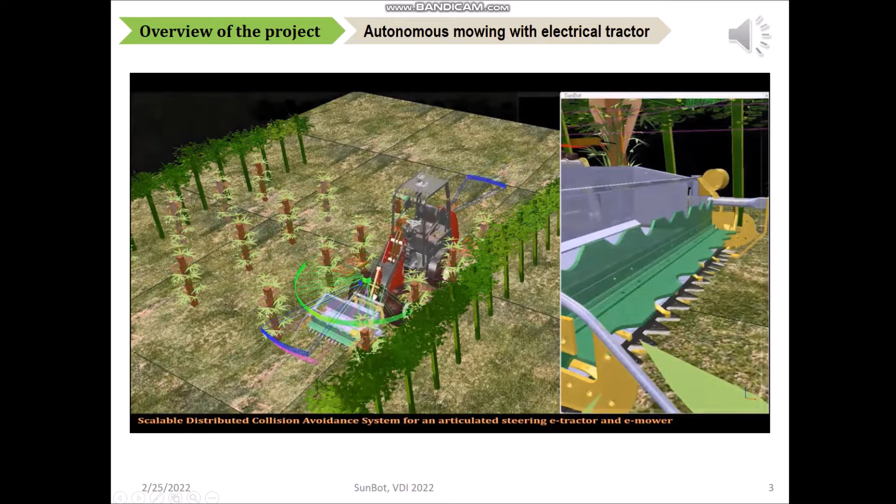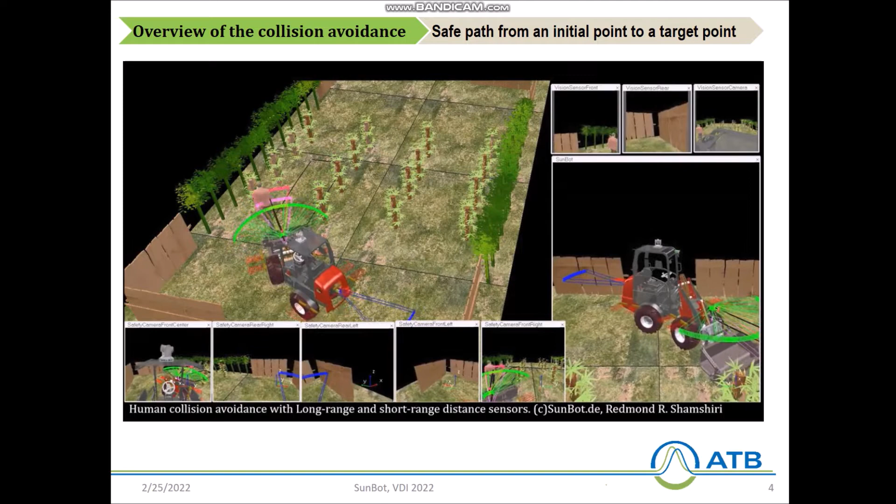The objective of this study was to develop a collision avoidance toolbox for SunBot electrical tractor. For this purpose, we used a four-wheel steering mobile robot platform for experimenting and validating the proposed hardware and software. This step was necessary to come up with a final solution for the main electrical tractor.

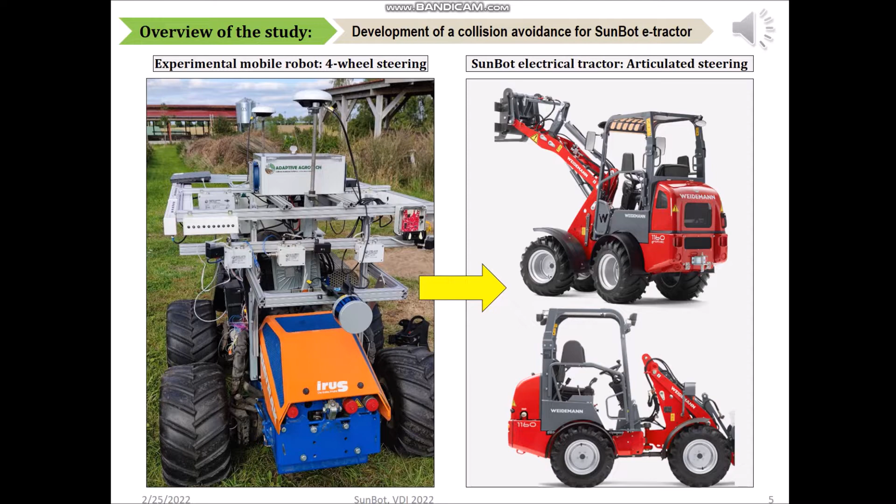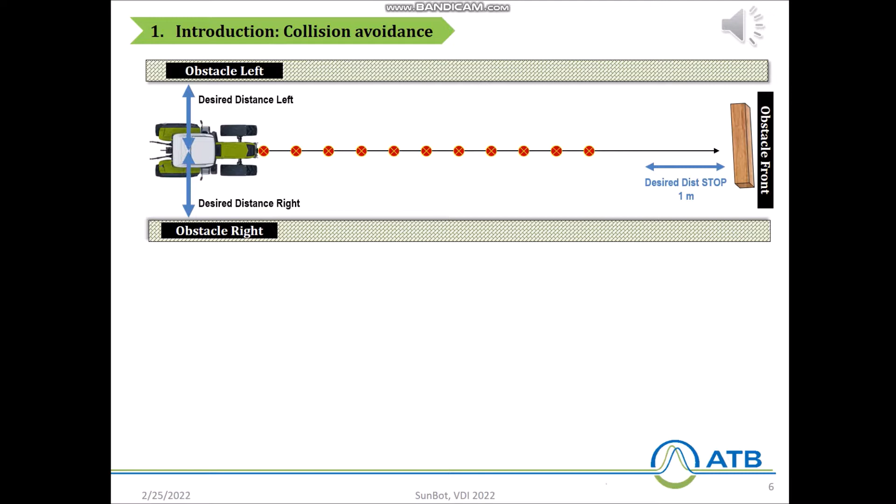To be on the same page, let's look at the overview of a general collision avoidance system. As it can be seen from the slide, we have an orchard tractor that is required to autonomously navigate inside plants row, while at the same time manage to be in the center of the row and avoid obstacles on the front, left, and right. These obstacles include random objects, human, animals, and bush support.

For this purpose, we need a set of reliable sensors that can measure the distance between the vehicle and its surroundings at a minimum rate of 10 readings per second. Based on these measurements, an error signal is generated by comparing the desired distance and actual distance between the vehicle and the obstacles. The main objective is therefore to drive that error to zero.

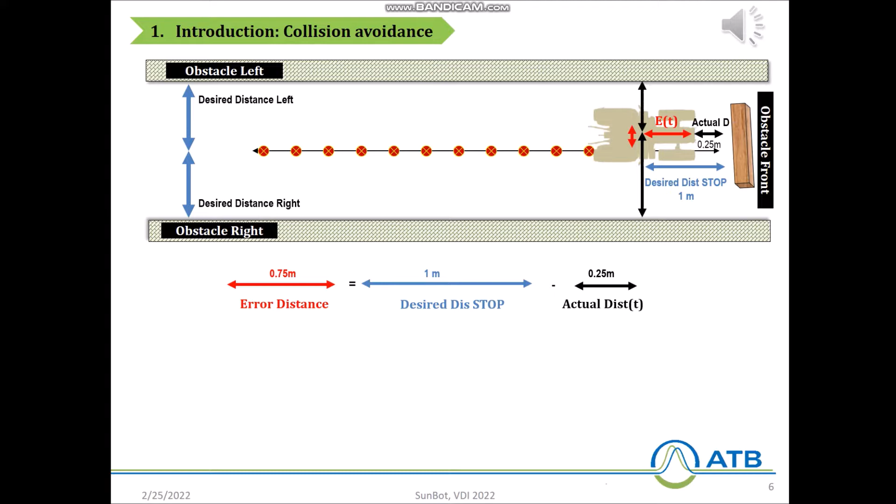Here is a simple closed-loop feedback control system that shows how the process of controlling the vehicle based on the generated error is carried out. The sensor shown here is responsible to measure a distance between the vehicle and the obstacle.

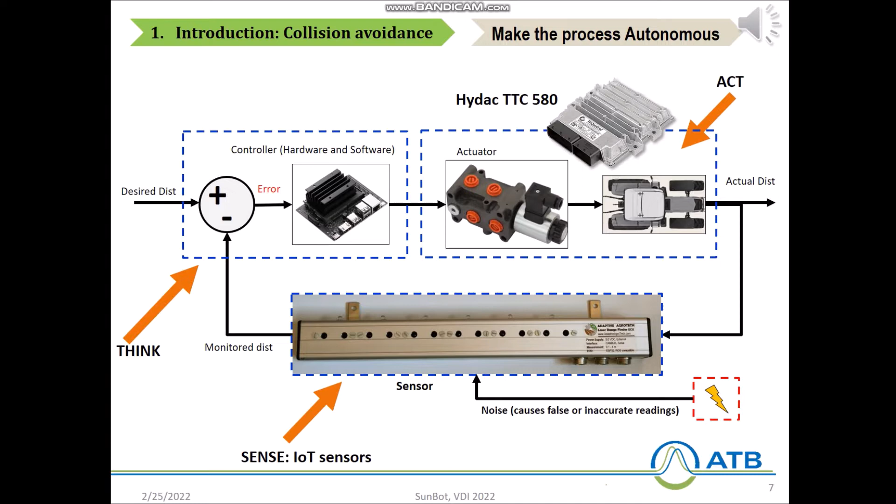A Jetson Nano computer with a control algorithm that can be PID, fuzzy knowledge-based, or machine learning algorithm does the computation. This is called the controller, which outputs control signals directly to the actuators such as electro-hydraulic valve or to an industrial controller such as Hydac TTC 580, which is responsible for vehicle control.

Some of the main challenges of the research can be summarized as follows. Berry orchards have unstructured plant row boundaries. Outdoor conditions such as light levels, debris, high-density bushes, and other natural disturbances can cause noisy measurement on sensors or even false readings. Harsh environment, such as rain and sun, can interrupt the central automation system.

The pictures below show geometrical variation in the rows and high-density bushes, as well as the presence of random stems and leaves that can block the sensors or be treated as obstacles.

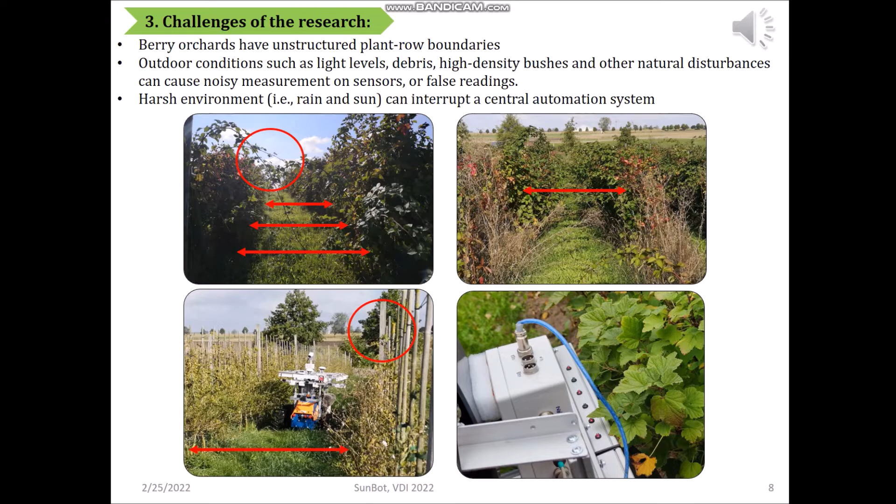For the purpose of autonomous navigation, a commercially available GPS-based navigation toolbox was purchased and installed on the mobile robot platform. It should be noted that the purchased navigation toolbox did not provide obstacle avoidance features, meaning that the robot could have collision with random obstacles while doing autonomous navigation.

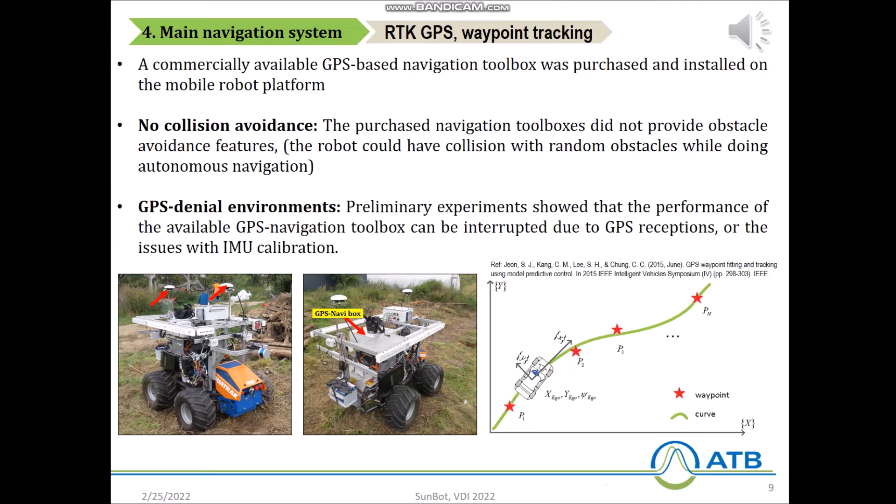The task of autonomous navigation also needs to account for GPS denial environment. Results of our preliminary studies and experiments and field evaluations have shown that the performance of the available GPS navigation toolbox can be interrupted due to GPS reception or the issues with IMU calibrations.

A proven solution to collision avoidance is the use of LiDARs. Although high-end LiDARs are widely used for obstacle avoidance, they add extra cost and maintenance to the vehicle, which makes the final system too expensive to be used by farmers. In addition to that, a decision was made in the Sunbot project kickoff meeting to develop an alternative sensing solution that replaces high-end LiDARs.

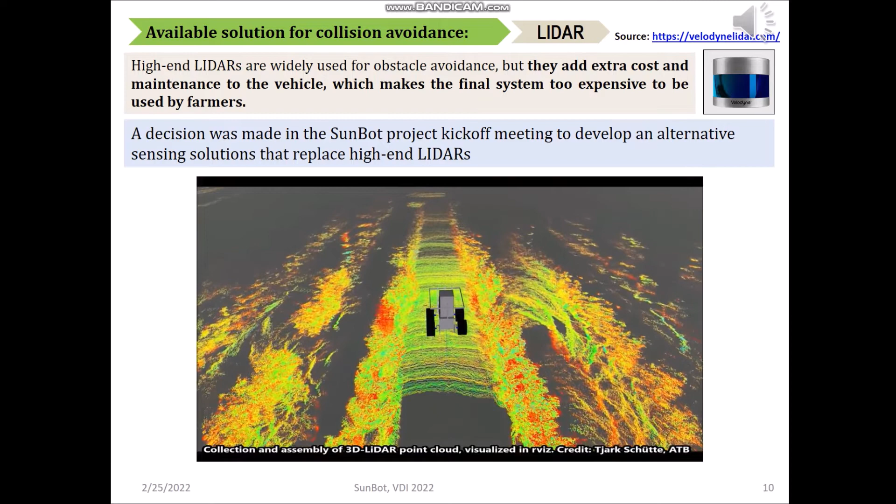The video below shows the collection and assembly of 3D LiDAR point cloud on the four-wheel steering mobile robot platform, visualized in ROS RViz. The data is captured using a Velodyne VLP16 LiDAR and georeferenced based on RTK GPS and odometry information.

The main objectives of this study can be summarized as follows: to produce the error signal and then to drive that error signal to zero. The focus of this presentation, however, is on the very first objective.

For this reason, we had to design and develop hardware and software for basic obstacle avoidance tasks of the robotic mobile platform that has the main following features: modular ECUs, distributed control system, ROS-based software, and the communication between ECUs were designed to be serial and CAN bus.

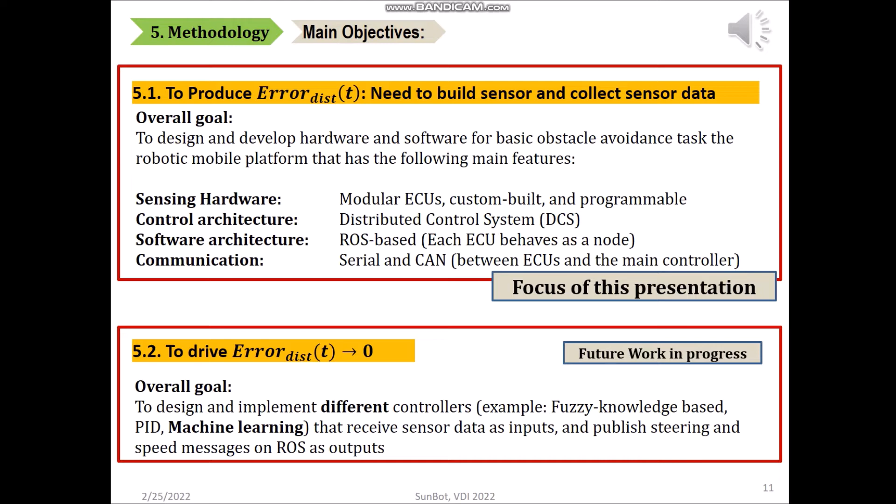Here is an overview of the experimental mobile robot platform with an installed RTK GPS Navibox and the proposed collision avoidance system, including multi-channel short-range infrared sensors and long-range laser sensors for distance detection.

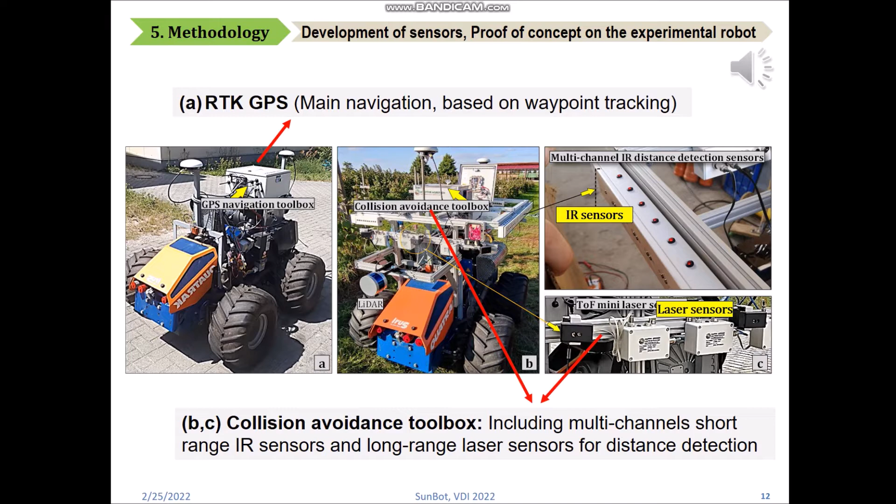Here is an overview of the multi-channel infrared sensors that were installed on the left and right side of the robot. Each of the sensor modules was programmed separately to act as a ROS node, in a way that raw measurements and processed data were published on ROS as a float32 multi-array message.

For the front of the robot, we used 3 long-range time-of-flight laser sensors for distance detection. The base sensors were TF Mini Plus, manufactured by Benewake, with maximum distance detection of 8 meters. Each sensor was programmed to send measurements below 2 meters. Each of the sensors was placed on a servo motor to scan the environment within a 30-degree rotation angle.

The sensor controllers were designed in a way that outputs could be transferred to the ROS computer via USB and CAN. For the sensor controller, we used the high-performance ATmega 2560 microcontroller with 16 MHz speed, 256 KB of flash memory, and 4 UARTs.

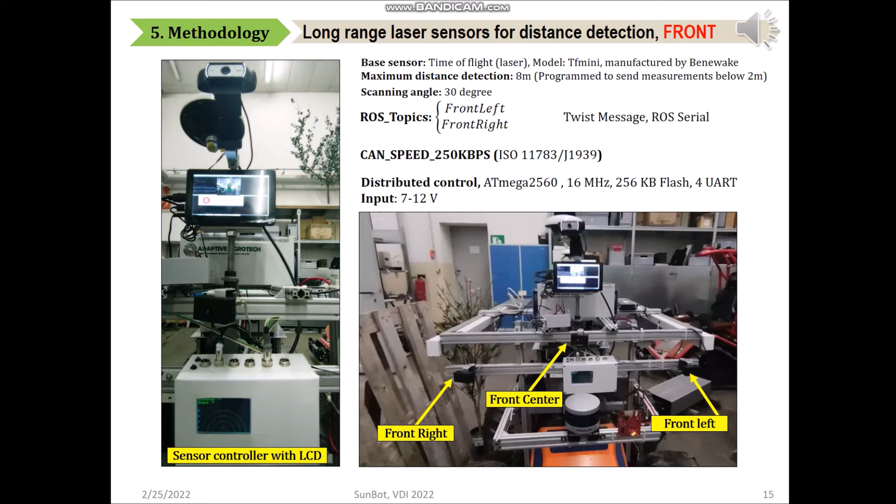Here is a short video demo of the front sensors mounted on servo motors scanning for obstacles.

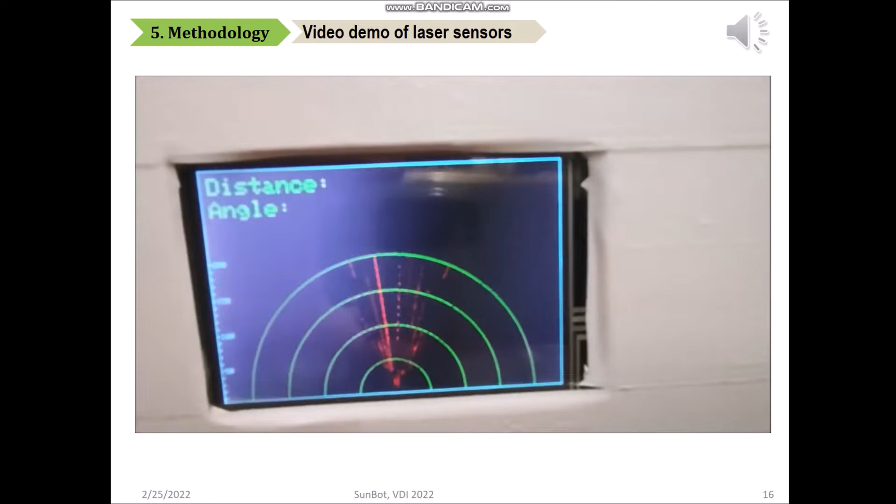The following computers were used in the collision avoidance toolbox. The industrial PC model HISTTON Fanless Core i5 was used for running simulation experiments in MATLAB and CoppeliaSim, previously known as V-REP. The NVIDIA Jetson Nano was used as the main collision avoidance controller, on which ROS was running and all control algorithms were implemented.

The Raspberry Pi Model 4 was used as a final sensor ECU for logging raw sensor data and for applying filters and pre-processing of the raw sensor data.

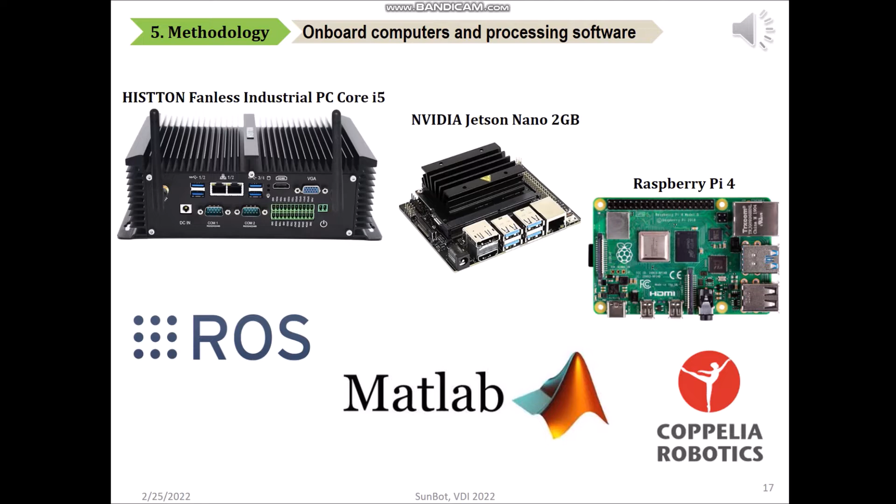For the purpose of troubleshooting and validating the hardware and software, we conducted several tests, including laboratory and field tests under different light conditions, indoor and outdoor, tests for the reliability of the hardware architecture and wire connections, and data collections for development of filters and control algorithms.

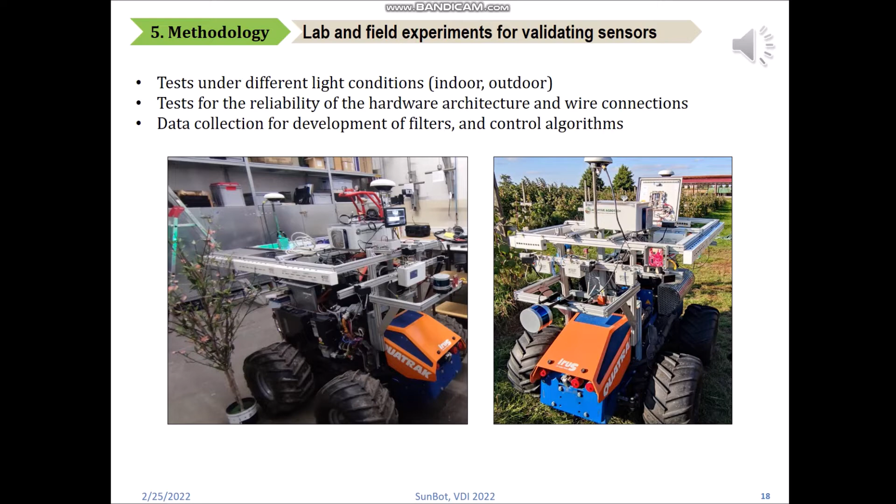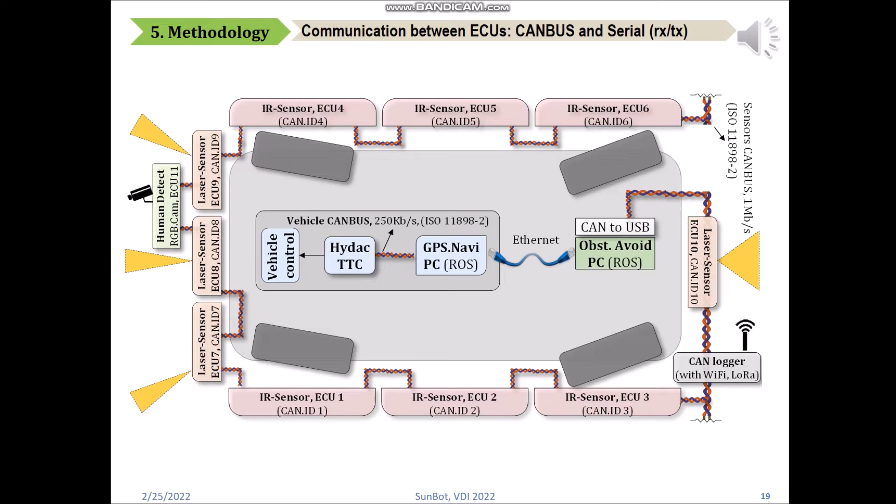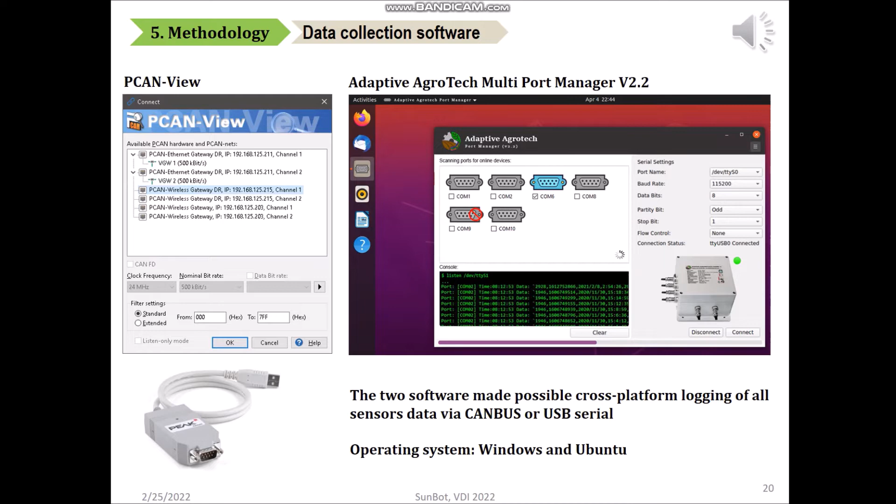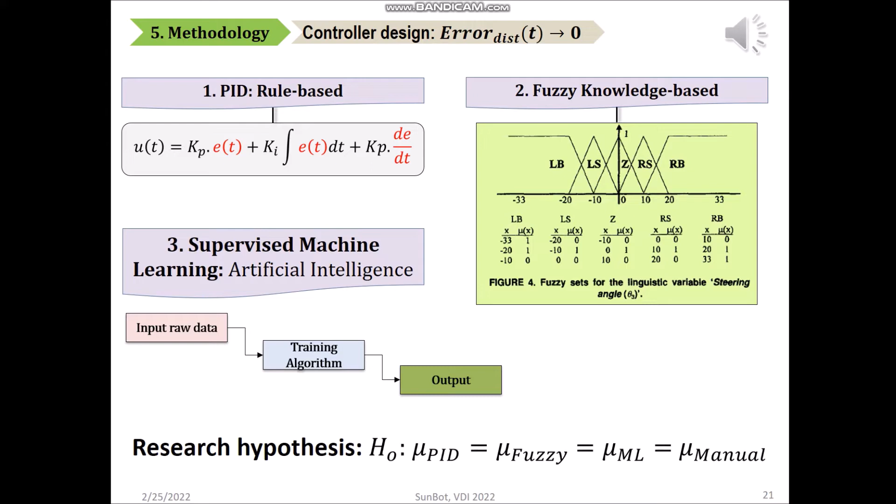For this approach, an expert operator will manually drive the robot inside the row using remote control and collect data. These data are then used to train the machine learning controller and to navigate the vehicle.

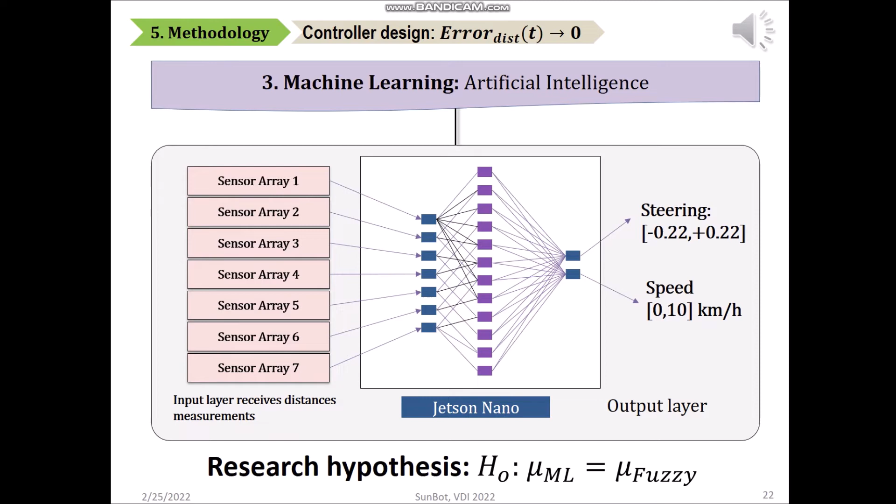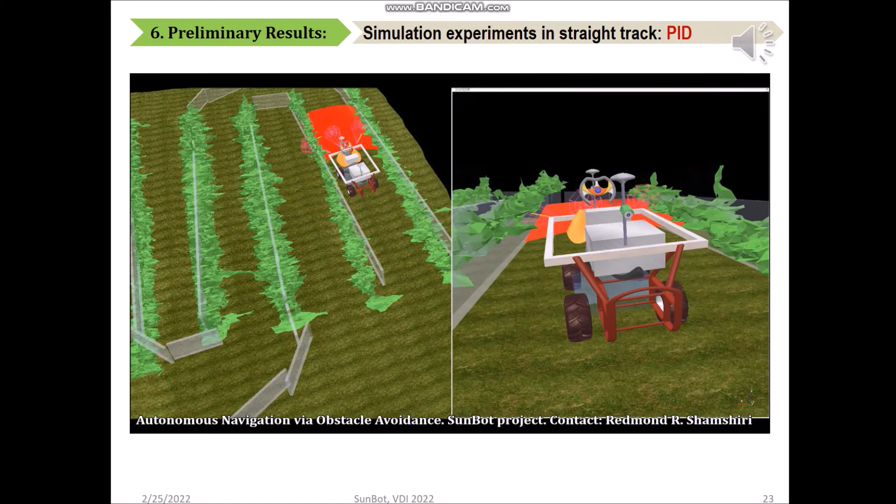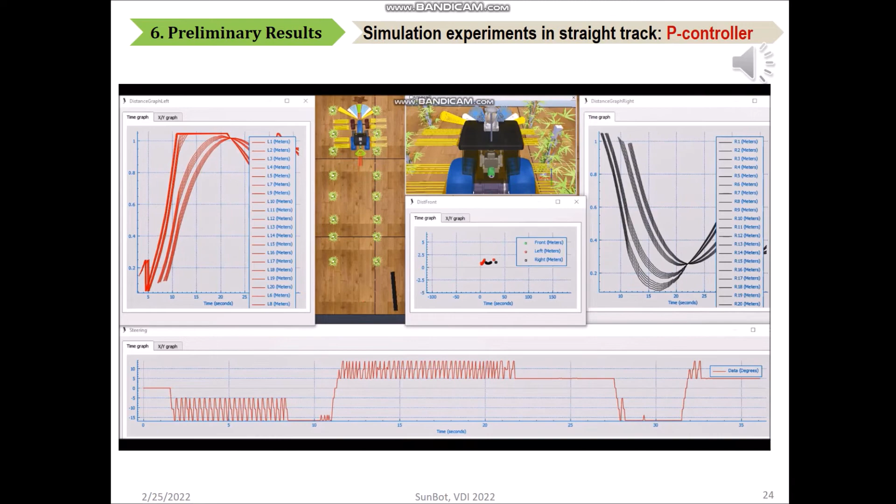This demo shows performance of a simple P controller in a simulation environment on an Ackerman steering tractor, but with the same sensor setup. The objective of this simulation was to test if the proposed sensing system can be used successfully on different robotic platforms.

For the fuzzy knowledge-based controller, we created 3 different test tracks in the simulation, including circular shape, oval shape, and a 90-degree angle track. The idea was to tune the parameters of the controller in a step-by-step approach. The same experiment setup will be created for actual field test with the actual robot.

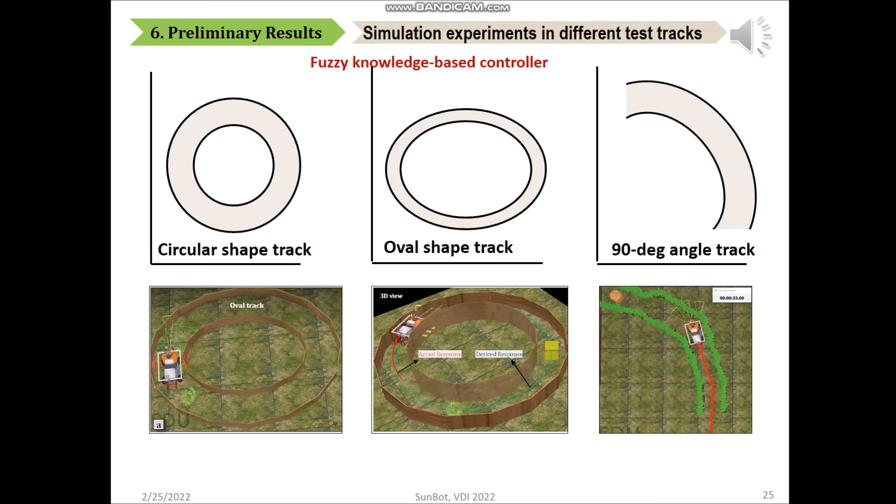This video demo shows the performance of the fuzzy knowledge-based controller in the simulation environment for the circular shape track.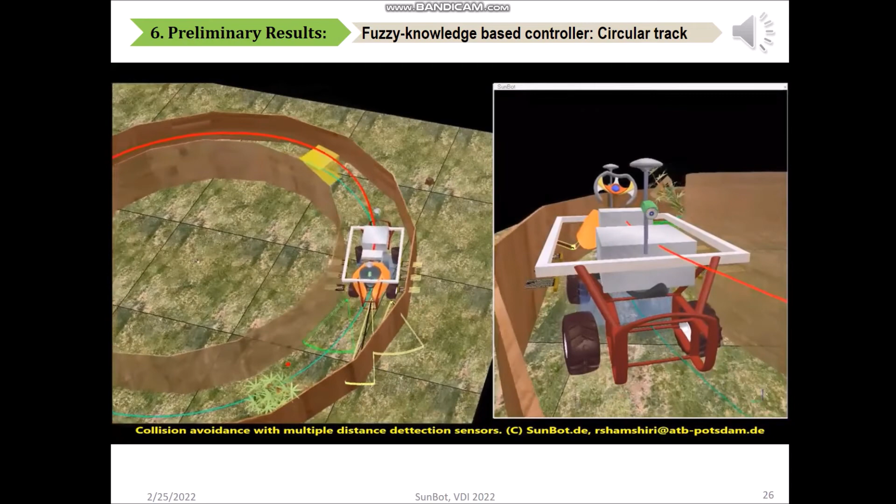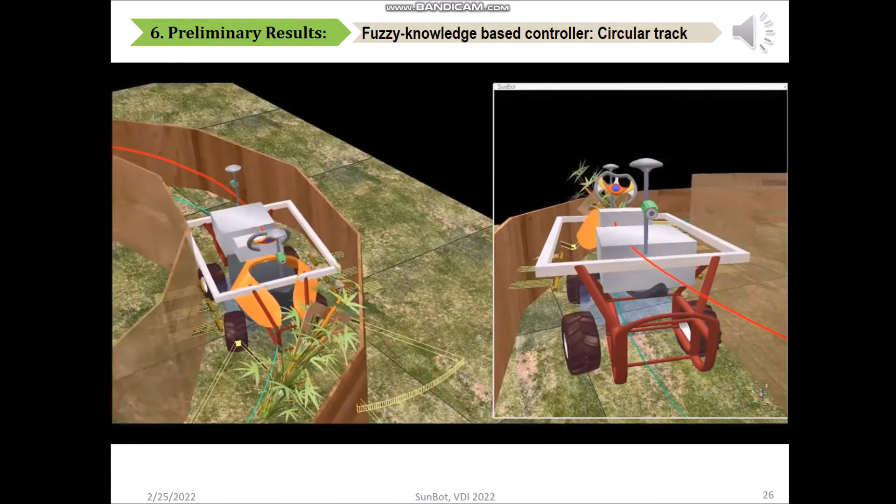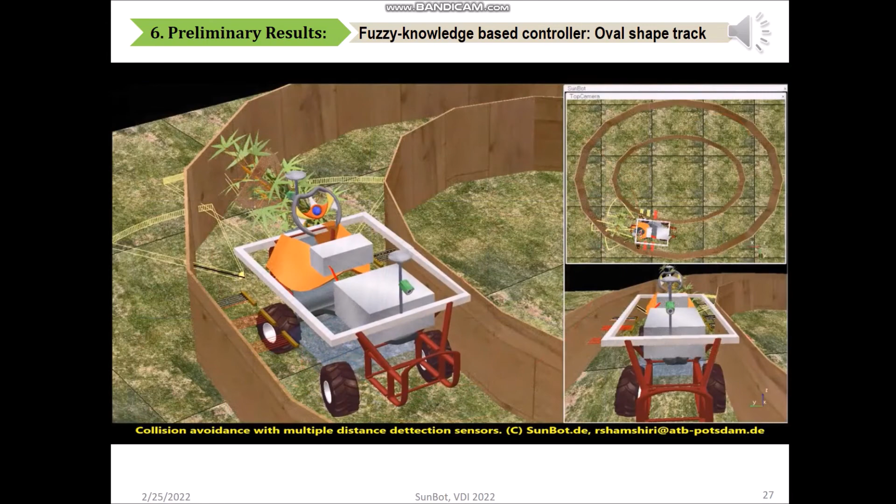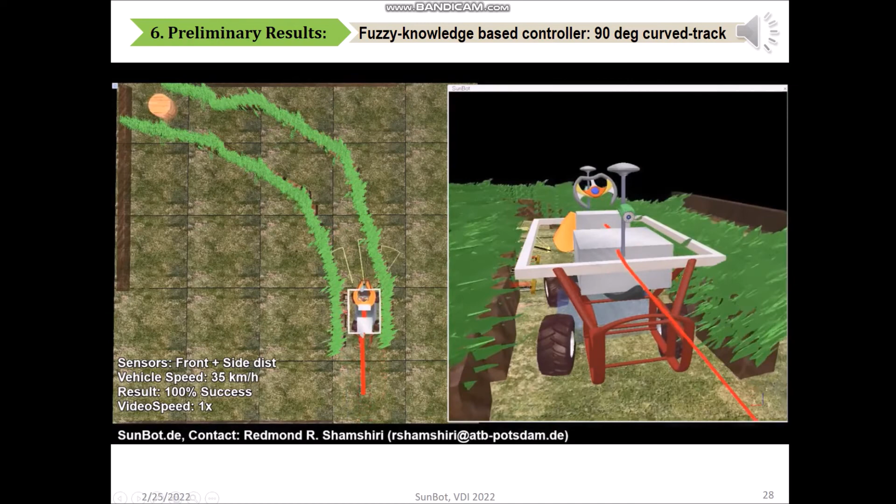This video demo shows the performance of the fuzzy knowledge-based controller in the simulation for the oval shape track. And here is a summary of tests with the mobile robot in the simulation environment for the 90-degree angle track.

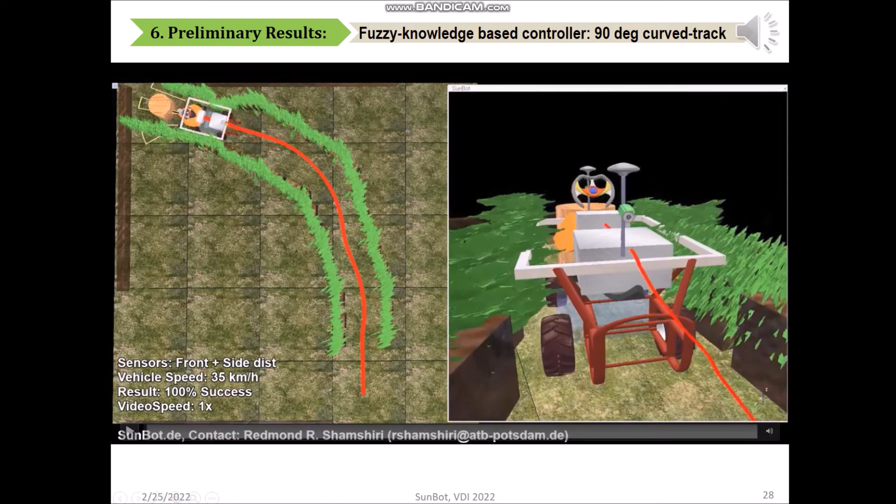Here are the plots that compare trajectory responses of the collision avoidance and manual drive controller with respect to the desired response in the oval shape track and the 90-degree angle track. It can be seen that in both cases, the collision avoidance controller has performed a better task than the expert operator manual drive.

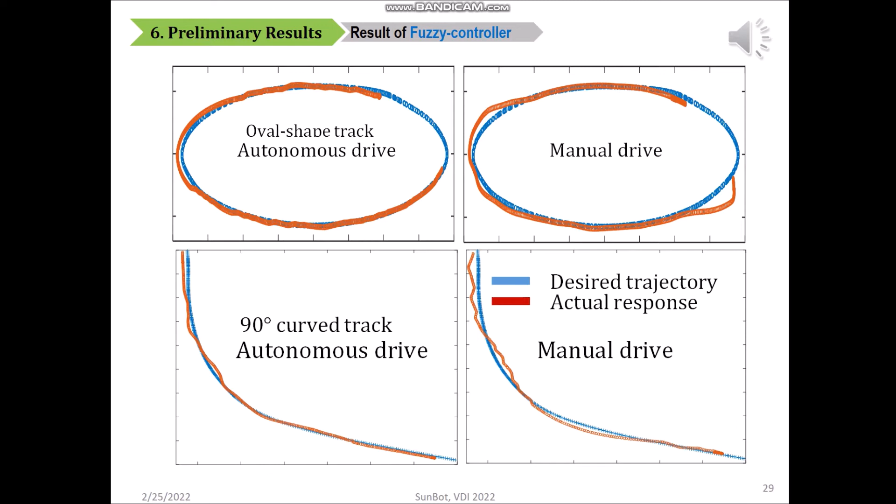This slide shows the plots of the sensing and control output resulted from the simulation study inside the oval shape track and the 90-degree curve track. The difference between the obstacles in the left and right sides of the robot in the two tracks can be clearly seen from the plots of the infrared sensors.

It can also be observed that the controller has maintained the minimum allowed distance between the left and right side of the robot and obstacles for each track, which were 0.4 meter for the oval shape track and 0.1 meter for the 90-degree curve track. The control output for both experiments was proportional to the steering angle of the real robot and varied between -0.22 and +0.22, corresponding to -22 and 22 degrees.

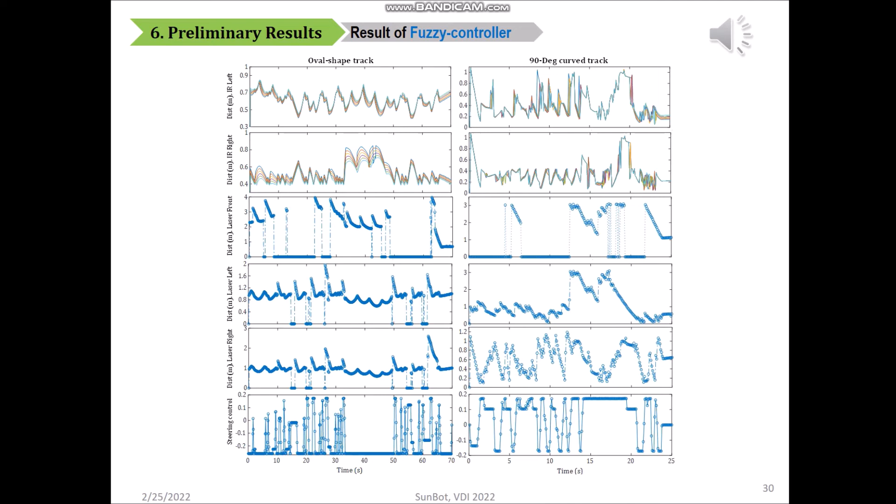For the speed between 5 and 35 km per hour, the combination of the infrared and laser sensors with fuzzy knowledge-based controller resulted in 100% success rate. While these results were entirely achieved in the simulation environment, they can provide a valid estimation of what should be expected from the real-world scenario.

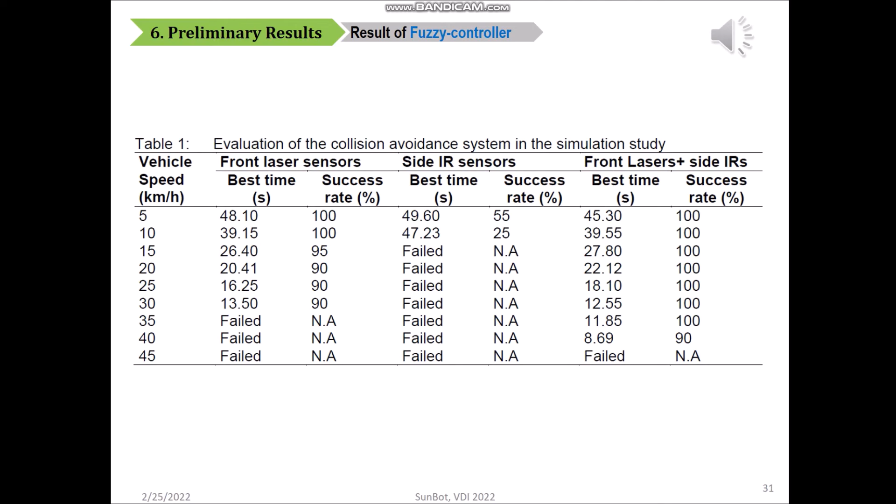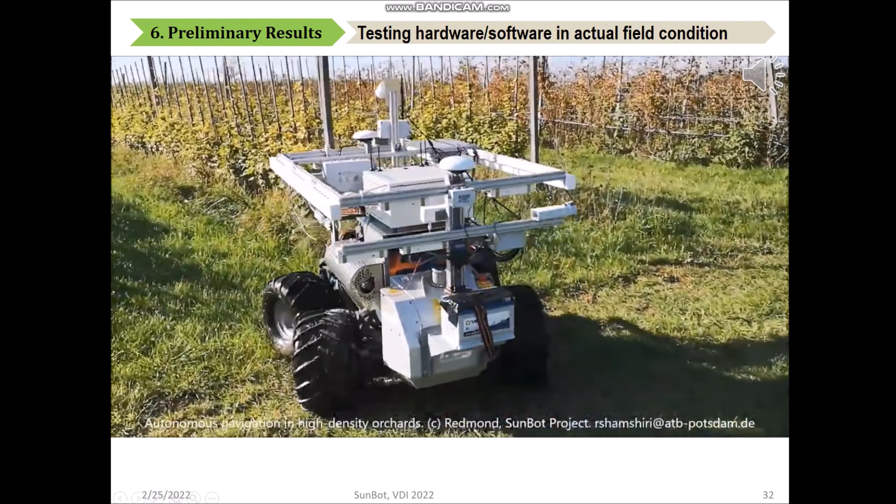This is a video demo of testing the robot hardware and software inside real berry orchard and data collection.

This presentation reported on the design of a distributed control system with multi-sensor data fusion and a fuzzy knowledge-based algorithm for collision avoidance of a four-wheel steering mobile robot. The objective was to stabilize the robot in the presence of an obstacle by enabling it to navigate from a starting point to a goal point in the shortest time.

This was achieved by a control strategy that reduced the error distance between the sensor readings and a minimum allowed distance with the left, right, and front obstacles. To analyze and test the robustness of the controller, 2 simulation studies were performed in 90-degree curve track and an oval-shaped track. In addition to that, field experiments were carried out with the actual robot to test the hardware and the reliability of the communication between ECUs.

The result of the study can be used as a proof of concept for the successful use of the proposed perception setup, which is multiple low-cost distance detection sensors as an alternative solution to high-end LiDARs for collision avoidance of mobile robots inside unknown environments or GPS-denied environments.